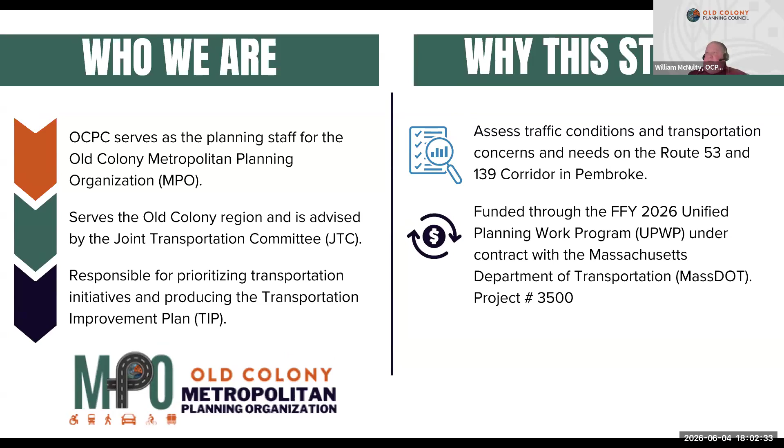For public engagement, we did do a survey. I'll talk about that survey in a moment. That received about 241 responses, so we were pleased with the response rate.

About 80% of the respondents were from the town of Pembroke, 7% were from Marshfield, 3% from Hanover, and 10% were from other towns in the region like Hanson. So that just highlighted what we already knew, that this is a major corridor for regional travel, and the people using it stretch well beyond the town of Pembroke.

We coordinated with MassDOT. This is a MassDOT owned facility — 100% of this corridor is under the jurisdiction of MassDOT. We've also coordinated several times with the town of Pembroke, with multiple coordination meetings with both the town and the state, talking about the study as we've gone along. It's been a very cooperative process all throughout.

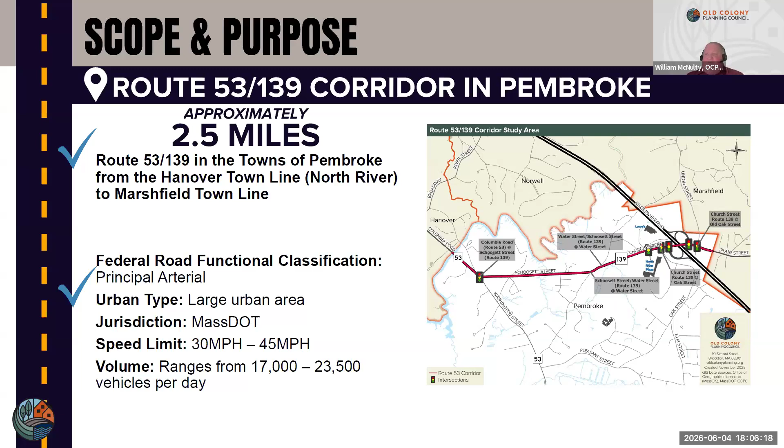Before we get into vehicular traffic, just to give you an idea of what this corridor offers in terms of amenities for bicyclists, pedestrians, and transit. When we talk about bicyclists and pedestrians, we often refer to them as vulnerable roadway users, because any incident on the corridor that involves them, they're very vulnerable. They don't have a lot of protection around them. They're at very high risk for serious injuries and fatalities if they're in a traffic-related accident.

You can see almost the entire length of this corridor does have sidewalk that varies in condition, also varies in width, ranging between about 3 feet to 5 feet wide - wide enough for at least one person to walk, in some cases two people side by side. Certainly not wide enough for multimodal use, so it'd be very difficult for a bicyclist to use that sidewalk.

And there is a section from Old Oak Street, where the urgent care facility is, to the Marshfield town line, where there are no sidewalks at all. There are no bicycle facilities along this corridor, and there is some transit service provided by GATRA that runs from the town of Marshfield into Pembroke and comes up to the North River Plaza. That transit service does provide connections to the town of Kingston, where you can make further connections to MBTA commuter rail.

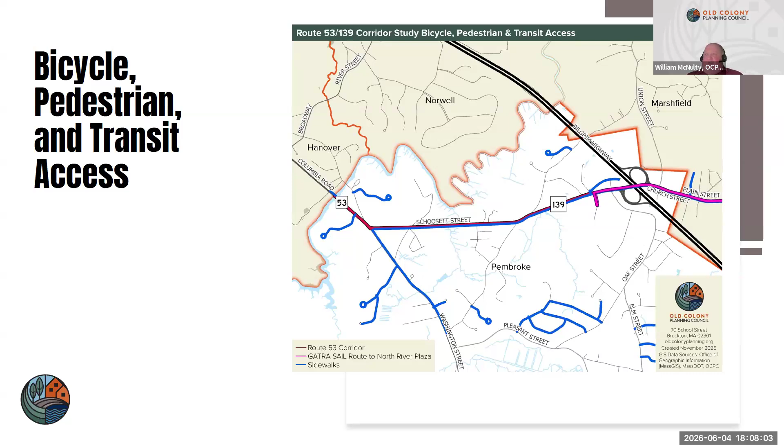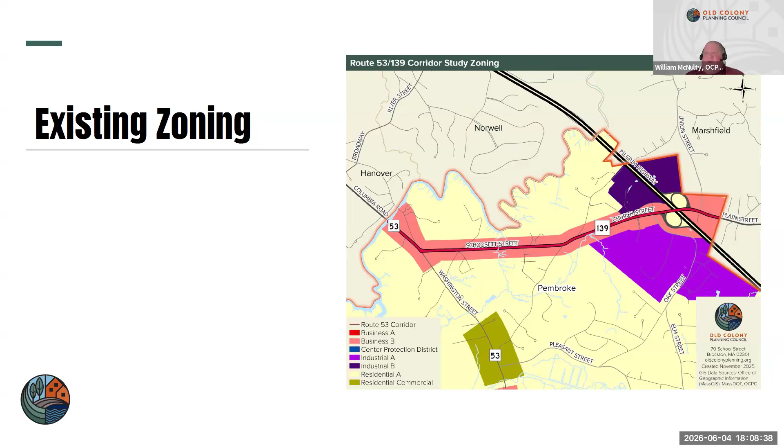Looking at the zoning along the corridor, I don't think it's very surprising to anyone - it's mostly zoned for business and commerce along the corridor itself. Just beyond those edges, just beyond that commercial development, there is a lot of residential zoning. But then closer to the Route 3 interchange, you do have some very large parcels that are zoned for industrial.

Accordingly, existing land use near the Route 3 interchange, we see a lot of high density commercial development as well as industrial commerce park development. As you get more west along the corridor, the commercial becomes more almost like independent, freestanding businesses, much less densely developed. But then that density increases again at Route 53, and there is a lot of residential development beyond that. Beyond that, business development as well as a lot of forested areas and wetlands, which brings in environmental protection that we want to make sure is incorporated in the study, especially when it relates to stormwater runoff.

Looking at volumes and speeds - volume tends to be very high between Oak Street and the Marshfield town line. This is where we see some of our highest traffic volumes. Not surprising, since that's where the highway interchange is, and that's also where we have the most commercial development. Speed really isn't an issue there - it's congested much of the time, so it's hard to speed in that area.

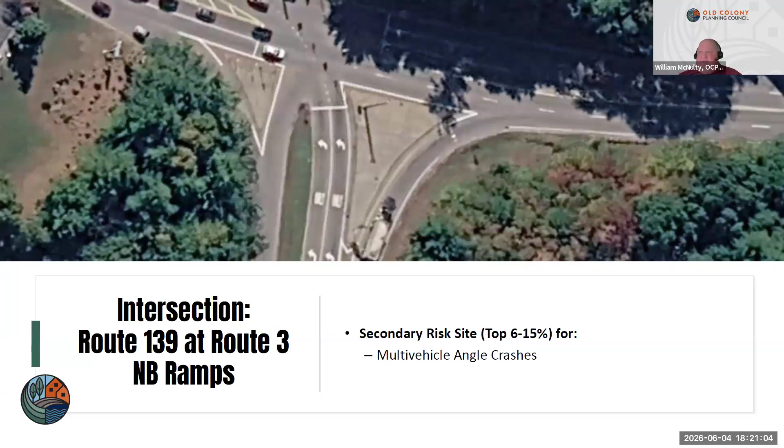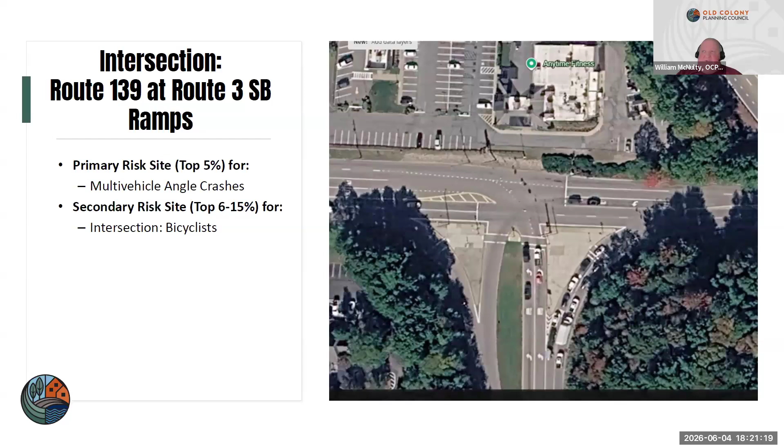On the other side of the highway, the intersection of 139 and the Route 3 southbound ramps is a primary risk site, with higher risk for serious injuries and fatalities among those involved in angled collisions, as well as a secondary risk for those on bicycles.

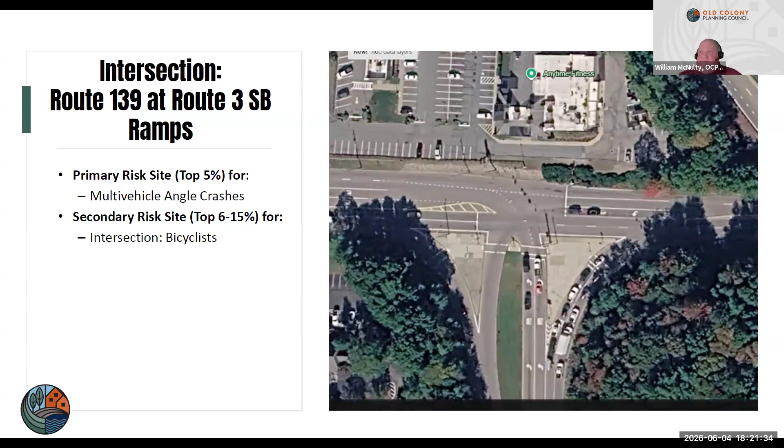The purpose of identifying where these risks are is to target where we want to focus our recommendations in this study. It doesn't mean these are the only places we'll make recommendations, but it gives us a good starting point.

The intersection of 139 at Old Oak Street and North River Plaza is a primary risk site for those involved in angled collisions.

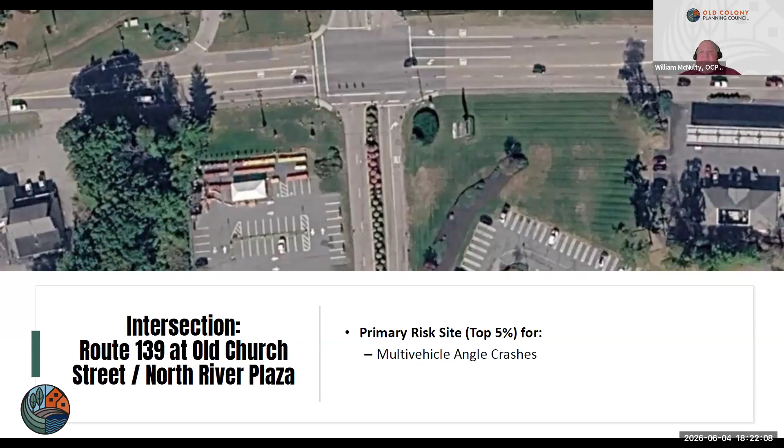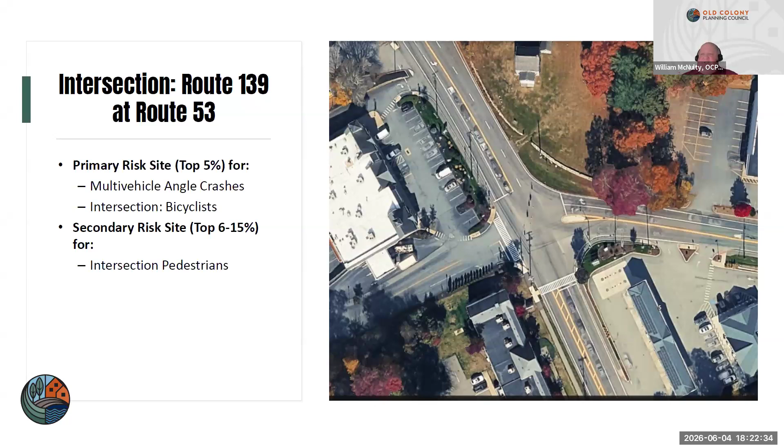We also looked at segments, particularly high risk segments for bicyclists. There's a primary risk segment on 139 from Old Church Street to the Route 3 northbound ramps, basically from Lowe's up to underneath the highway overpass.

And then to where the urgent care is - that would be a high risk, primary risk site for bicyclists.

Secondary risks have also been identified along multiple segments of this corridor. I'll note that part of this corridor has also been identified by the state as having medium to high likelihood for everyday biking.

That means, given the land use in the towns of Marshfield, Hanover, and Pembroke, and residents' desire to make daily trips to certain land uses, this corridor has high potential for everyday biking, which ties into this risk assessment.

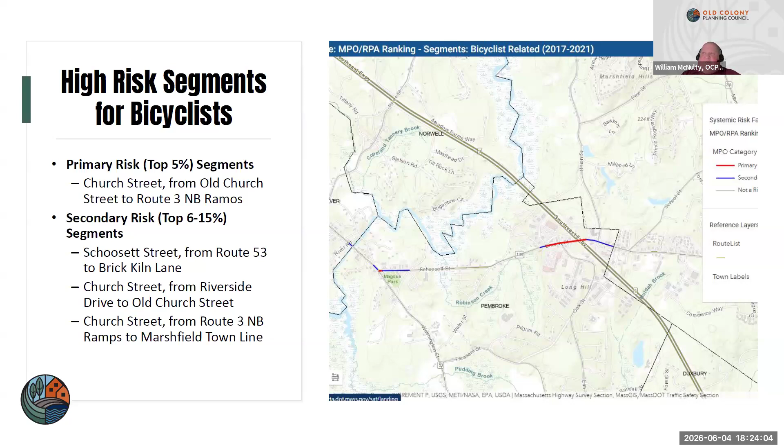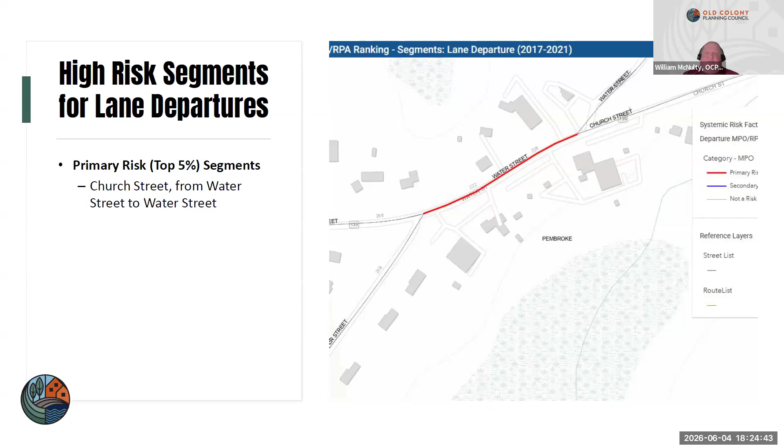The speed limit and roadway geometry certainly allow for that. So they're picking up speed, and in this particular section they're heading into some curvature - hence this is a high risk site for lane departures.

Given all this, what kind of improvements are we looking at identifying in the study? First is access management. There's already a lot of good access management happening with the developments near the Route 3 interchange, including some shared driveways, which is pretty easy.

For example, if you're at the 99 Restaurant, it's easy to get over to Old Church Street without ever going on 139. Likewise, from the plaza with urgent care, you can get over to where Burger King is without getting onto 139. So there's already good access management, but we'd look at methods for improving it.

Environmental - I showed an environmental map earlier. We certainly want to mitigate and limit any stormwater runoff into natural areas where there's forest or wetland, particularly those outlets of the North River.

That's something we would look at - first identifying if there are any issues right now, then making recommendations to improve that.

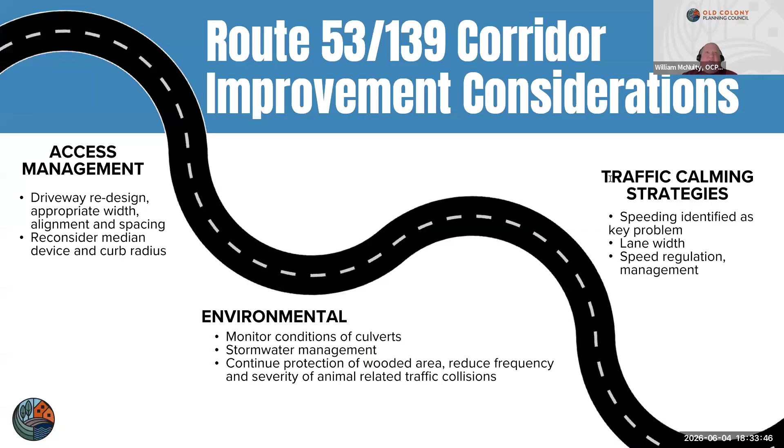While we wait for that - when we look at the intersection of Lorna as well as the intersection of Brick Kiln, we didn't see a high volume of crashes. Those are two locations where we're seeing some of the highest travel speeds, so we'd automatically be concerned about any crashes happening there, because when you have a through movement 85th percentile speed of 45 miles per hour or higher, any collision that's occurring, especially an angled collision, carries a high possibility of serious injuries.

Hi, can you hear me? Yep, yes, sorry, it's on my phone watching you. My name is Samantha Woods. I'm the director for the North and South Rivers Watershed.

I was particularly interested in that section of the roadway because we just purchased the land across the road there, at 160 Schoosett, and our plan is to make it into our headquarters for the watershed, and have it be a public regional center for river education and recreation. So I just wanted to hear what the current conditions for traffic were.

That was why I asked about the Lorna Ave accidents. We didn't see a big history of crashes there, but we'll certainly take a closer look at the severity, and see if there are any recommendations that can be made for that intersection.

When you're taking a left turn out of there - sorry, the current location is being used by a retail shop, and I'll have to take that left out of there. When people are accelerating at 45 miles an hour and coming at you, it's daunting. So I'm just trying to figure out if we can calm that down in that area, since we'll hopefully be having more people visiting that site.

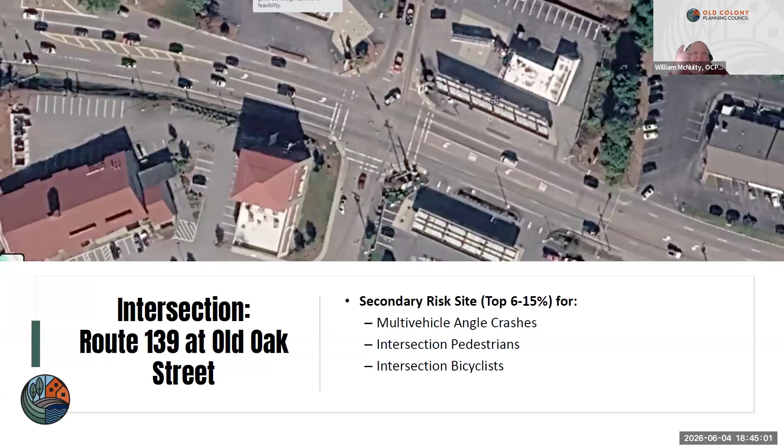Awesome, thank you so much. You're welcome. And the traffic calming comment, that was a perfect segue into what I was going to mention. So everything we've looked at and included in our report so far, I wasn't able to include in this presentation for the sake of time. I focused on some of the more specific locations, some of the high risk intersections. In terms of that area where Lorna Drive is, this was highlighted in the report and study.

There's a crosswalk there, actually the one lone crosswalk on this entire corridor, not including an intersection. It was probably fine by design standards when it was put in, but it's a little bit substandard of what we'd like to ideally see nowadays for a corridor like this with those travel speeds. So this has been identified as an area where we not only want to see that crosswalk upgraded to ideal standards by modern design standards.

We'd also, at least in this one particular area, like to identify methods to calm traffic and slow speeds down as they approach that crossing. Since this is the one location with a crosswalk, we'd want to make sure we see better sidewalk connections on the north side of 139. All the sidewalk along this corridor is on the south side, the eastbound direction. So where that crosswalk is, we'd like to see new sidewalks connected from there to some of the residential neighborhoods along that corridor.